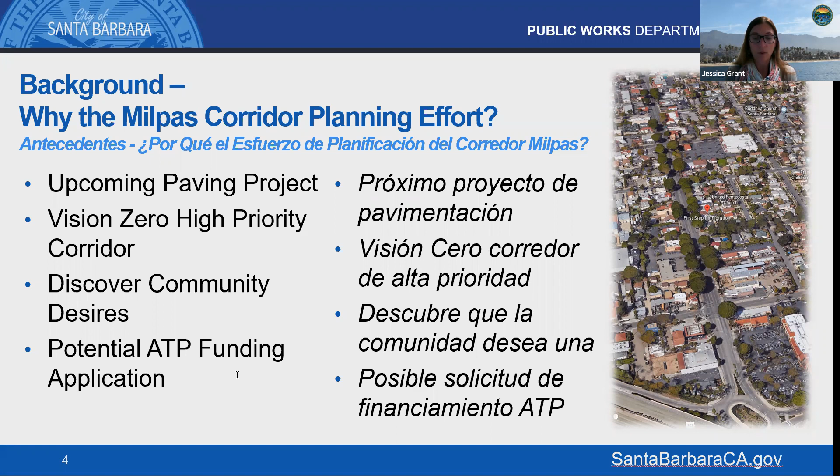So in October, we had the first workshop. It was a listening workshop to discover community desires and needs for the future of Milpas Street. We also had a supplemental survey as well.

Then in January of 2020, we returned to the community with proposed approaches to address community concerns. The proposed approaches that received community support at the approach workshop focused on pedestrian safety enhancements such as safer crossings, enhanced street lighting at intersections, tree management, and sidewalk widening.

In April 2020, we presented what we heard from the community and the suggested approaches, and City Council did agree with those, directing staff to apply for an active transportation program grant, which we did back in 2020.

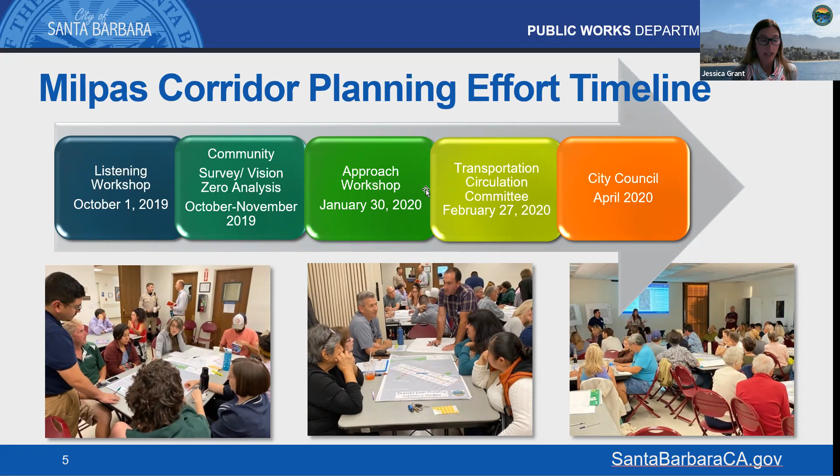So the next few slides will cover the approach from 2020 that was community supported. It basically involved improving the pedestrian environment and space by reconfiguring the sidewalks and the tree wells, and also improving pedestrian safety at intersections, all in synergy with the upcoming maintenance project.

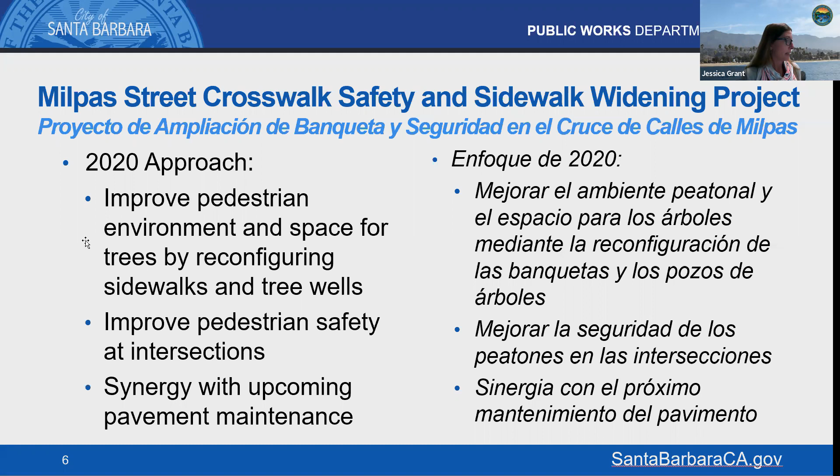As a specific example, we don't have the entire corridor, but just a snapshot of a block along Milpas between Mason and Yanonali Street. Shown in red is the realigned curb, again to make more space for the existing mature trees. Behind that, the sidewalks would be widened, and these are the parking pocket concepts.

Each intersection would also have improvements for lighting. In orange are the existing lights, but we also proposed additional street lighting at the other corners of the intersection, so that all legs of the intersection would be well lit.

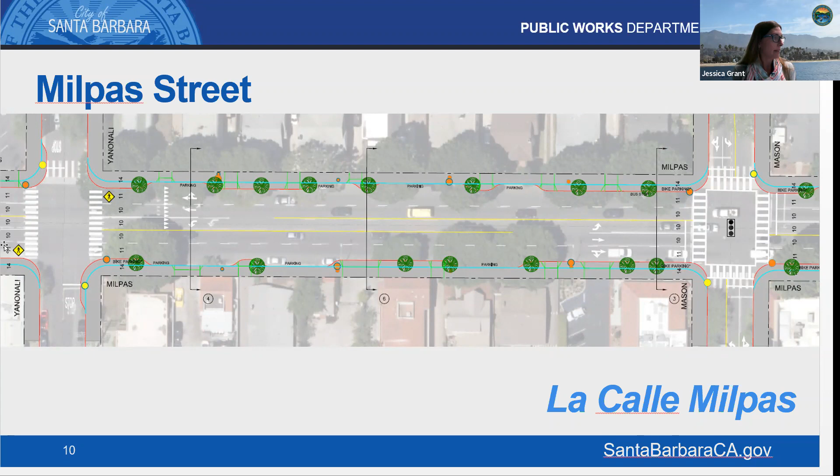For a project of this size and scope, we had to seek grant funding from the Active Transportation Program, which can help fund higher dollar projects. It's an extremely competitive program. The state releases approximately 450 million statewide every couple of years, and since the cycles started in 2014, each cycle has become more and more competitive.

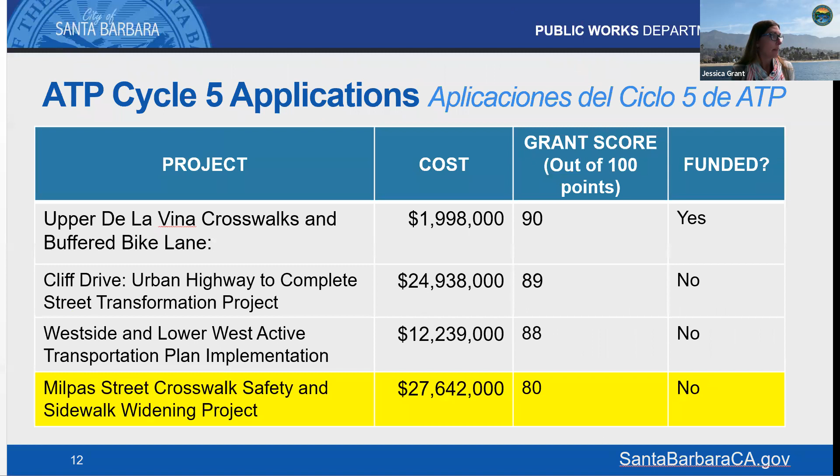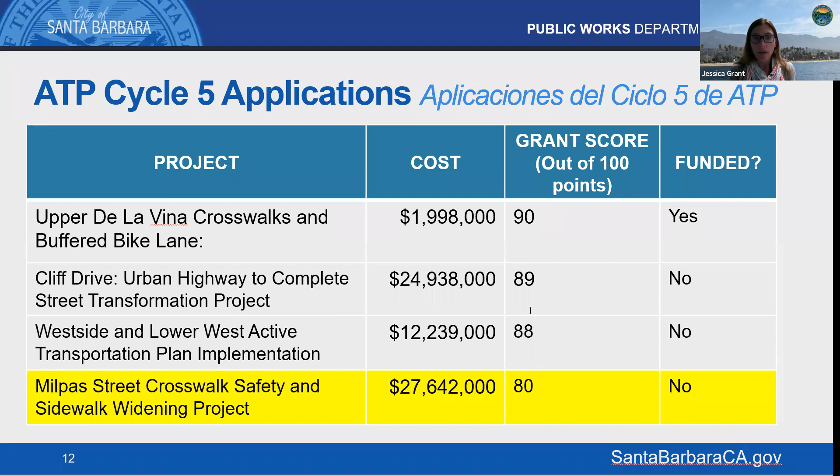In 2020, we submitted 4 grant applications and received funding for only 1. Unfortunately, we did not score well on the Milpas application. The cutoff was 90 points, and we received 80 points for the Milpas application.

When we met with the state a couple of times to review the scoring for this application—it takes a couple of meetings with them—the grant rubrics for this application are very detailed and specific. What we heard from the state is that the project was not transformative enough based upon the project costs. The cost for these improvements along the Milpas corridor was approximately $27 million.

So the state's advice for us as a city was to look at rescoping the project so it would not be judged on the transformative rubric. It would go from a larger project to a medium-sized project, and in funding terms for that program, it would need to be reduced to approximately $10 million.

Nothing about the project was necessarily bad—it was all good—but the state said to really focus on intersection safety and comfort, and on the bus stops, to improve the transit comfort along this very busy corridor.

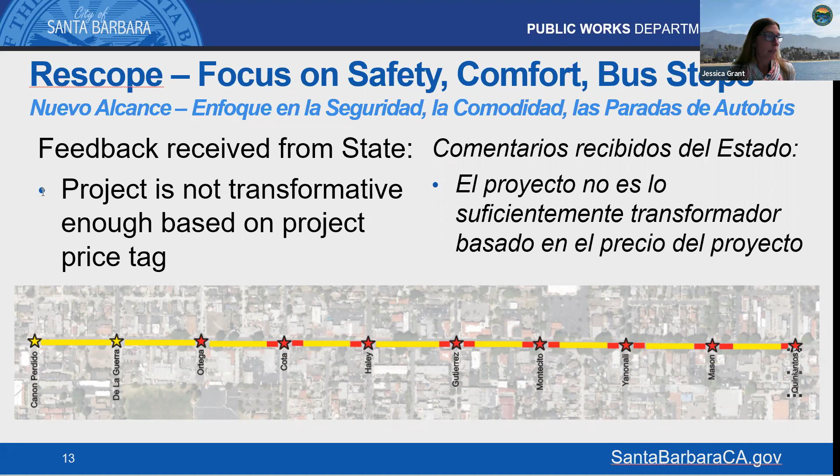So your feedback for tonight—we really want to hear from you about this rescope. For the upcoming maintenance project, what we could do within our normal pavement maintenance budget would be to focus on high visibility crosswalks, better quality pavement markings, sidewalk repairs, and ADA improvements as well.

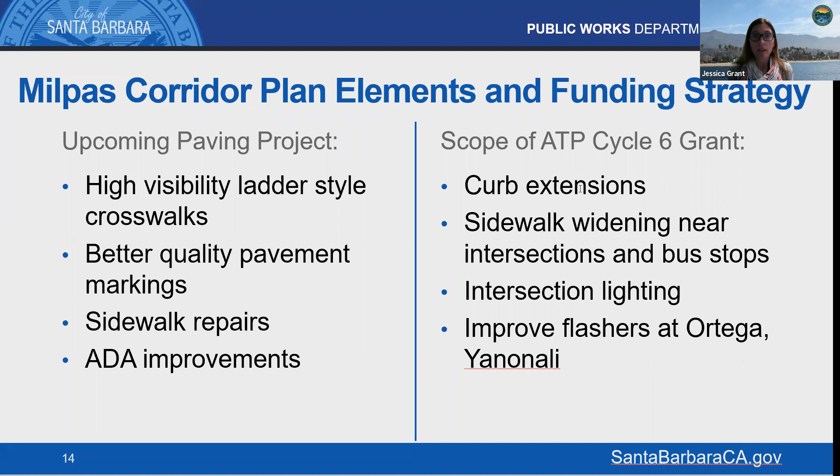What we think would be a good scope for this upcoming grant cycle, due in June of this year, is to add curb extensions at the intersections, sidewalk widening near the intersections and bus stop areas, enhanced intersection lighting, and improved flashers at the Ortega and Yanonali intersections.

So to repeat, these are the items we are proposing to apply for, shown in red. The areas in yellow will be maintained, but the major work will happen near the intersections. At this time, we do not know when funding will be available to widen the sidewalks in the middle of the blocks.

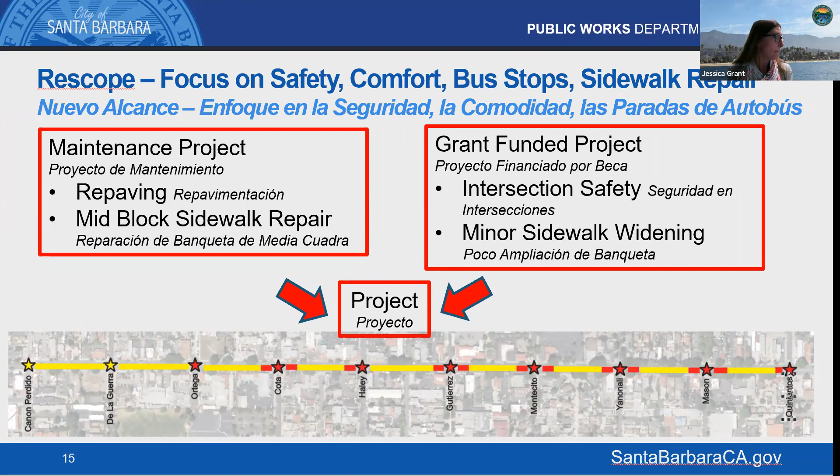This is an example as far as when we look for safer crossings, to include high visibility markings, as you see in this photo on the left. And then at the Ortega and Yanonali intersections, we'd also introduce an overhead flasher.

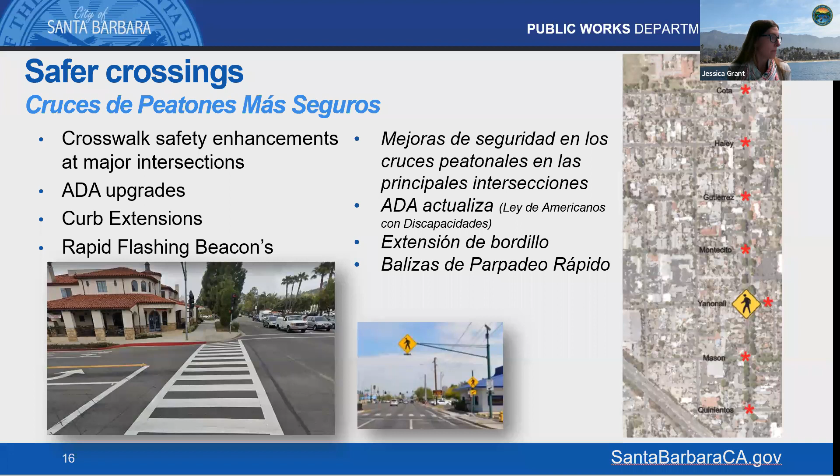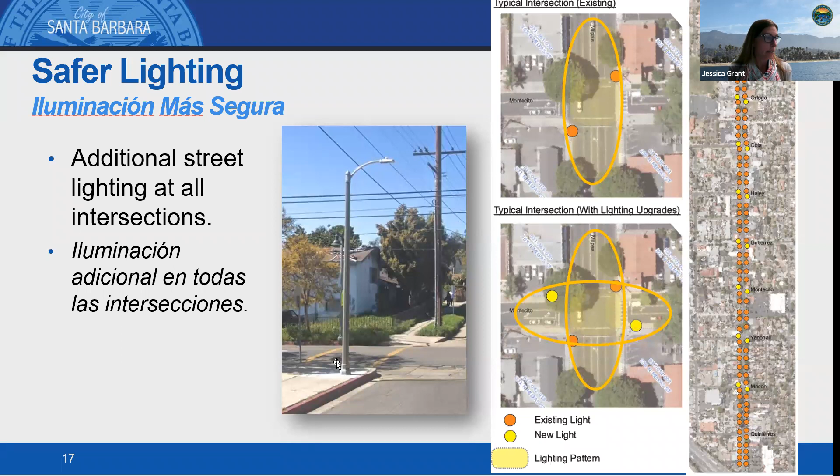We'd also add lighting at all the intersections between Quinientos and Canon Perdido streets. This aerial image shows the existing lighting and the area it covers. We're proposing to have lighting at all legs of the intersection.

We would also have some curb realignments at the intersections, which would help with sight and visibility, and allow more room for the existing bus stop locations. As you can see, this is one of the existing bus stops, but there's not a lot of room in this area. A lot of the bus stops feel pretty cramped and narrow.

So widening out the curb will allow for more room at those locations. With that, I would like to pass it off to Derrick Bailey, our city traffic engineer, to go over each of the proposed intersection improvements in a little bit more detail.

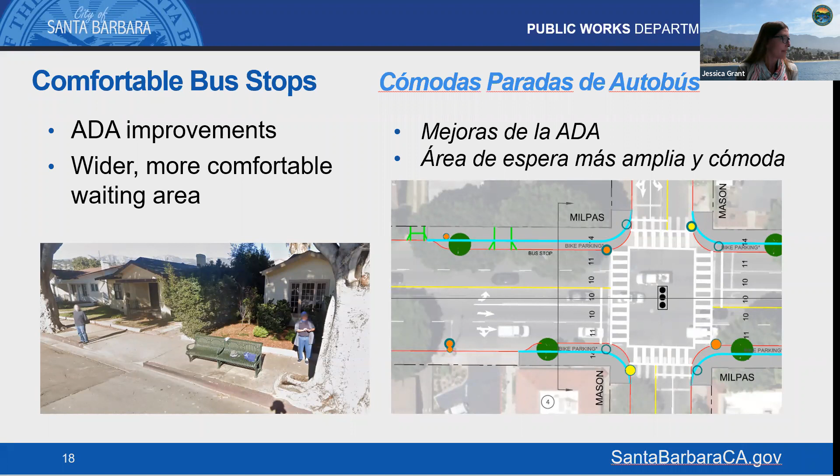Thanks, Jessica. I'm going to go fairly quickly through these layouts. It's a lot to digest, and it can be difficult to fully understand just based on what's on the computer screen. So I'd encourage you, if you have time, to join us on Saturday. We'll have full printouts of the entire corridor so you can take a better look in more detail, or go to our website. Those same printouts will be available there too.

At a high level, at Canon Perdido Street there are no changes other than new lighting. The way the lighting exists right now, the lights hang over Milpas Street, so the Milpas approaches are well lit, but the side streets are not. Those yellow dots on the screen are new lights, and the orange ones that hang over Milpas are existing lights that won't change. So that'll be new, safe lighting for the intersection.

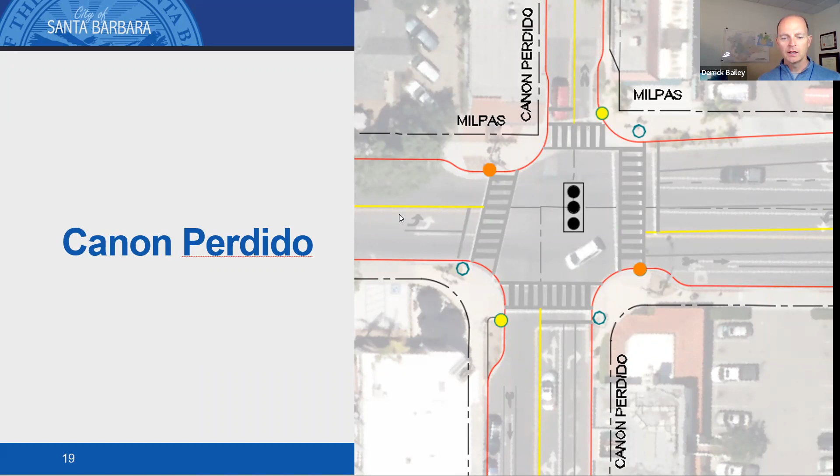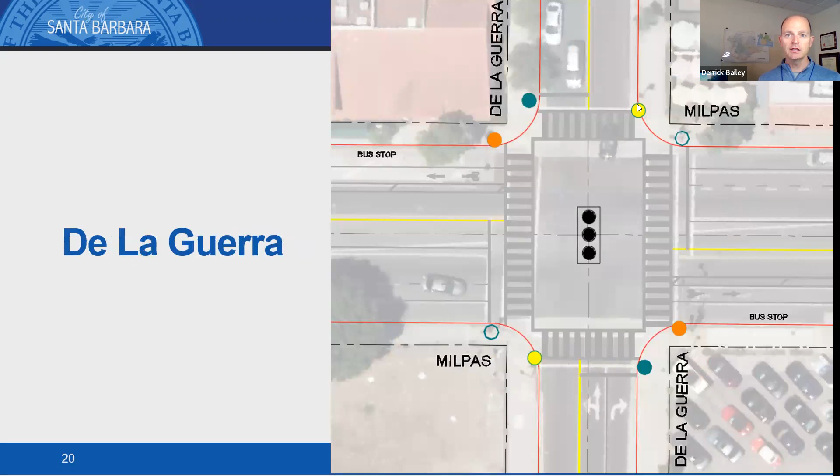De La Guerra Street, similar to Canon Perdido, just new lighting, and we would replace the ADA access ramps with the paving project, as well as any sidewalk repair needed in the area.

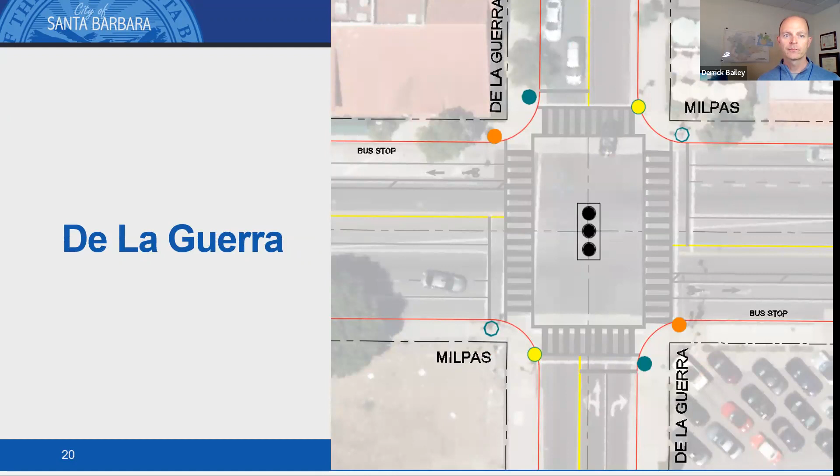There's also new lighting planned on the side streets. There is a development proposed on the northwest corner, and depending on how that moves forward, we'll have to coordinate with them as well.

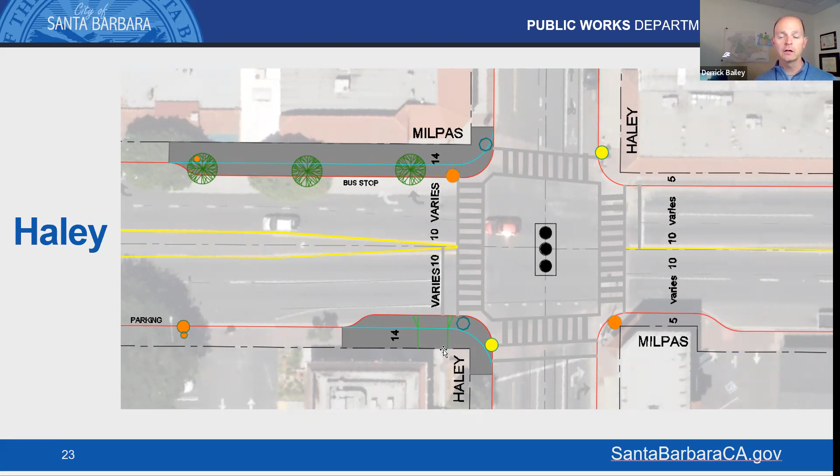Moving to Haley Street, on the north side, the northeast and northwest corners, in front of the Jack in the Box and across the street, that's where the sidewalk widening will be shown in dark gray. The south side of the intersection will just be sidewalk repair, since that's already a narrowed part of the street, plus new lighting on the side street approaches.

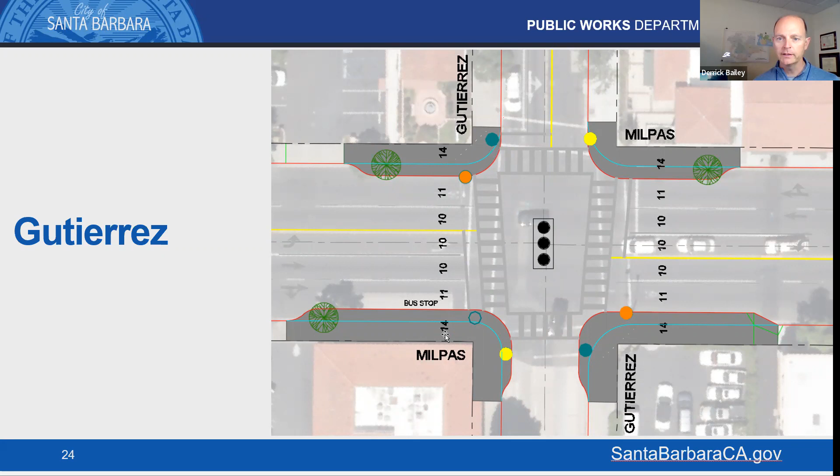At Gutierrez Street, all 4 corners would be widened, including the bus stop on the northwest corner across from the 7-Eleven, and new lighting.

Montecito Street: all 4 corners would be widened and new lighting added.

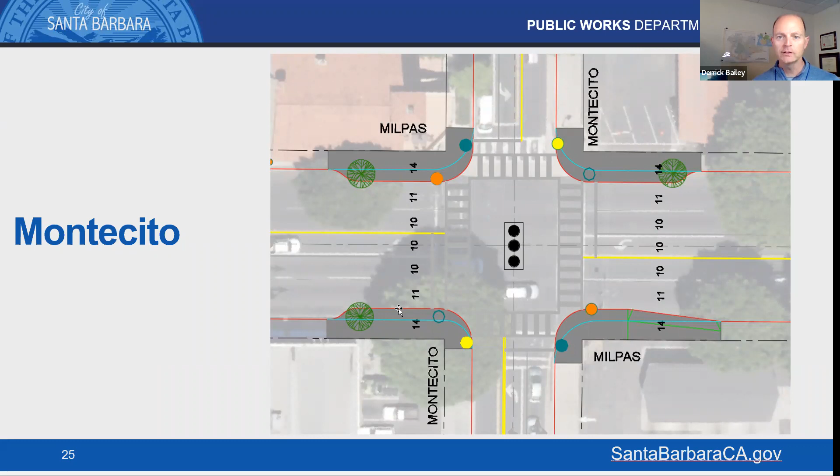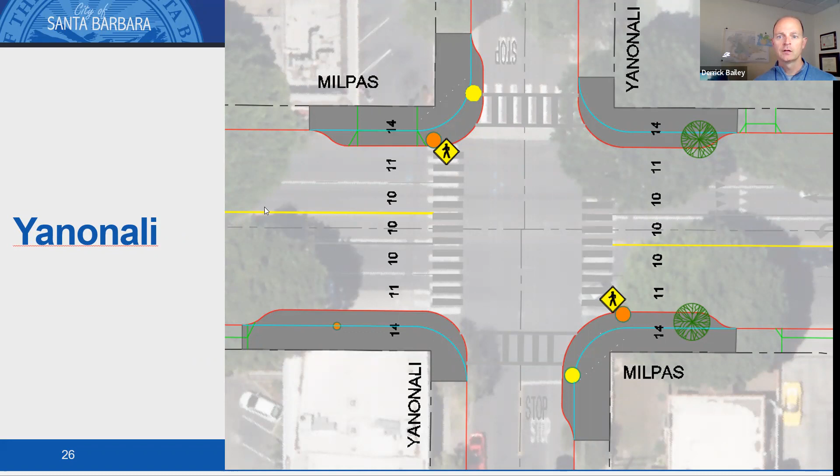Yanonali Street would be next. Again, all 4 corners would be widened, and this is where the mast arm mounted overhead flashers will be installed, along with new lighting on the side street approaches.

Mason Street would have the most sidewalk widening, since that's where there are 2 very busy bus stops. So all 4 corners will get widened, especially those 2 corners with the bus stops, plus additional lighting in the area.

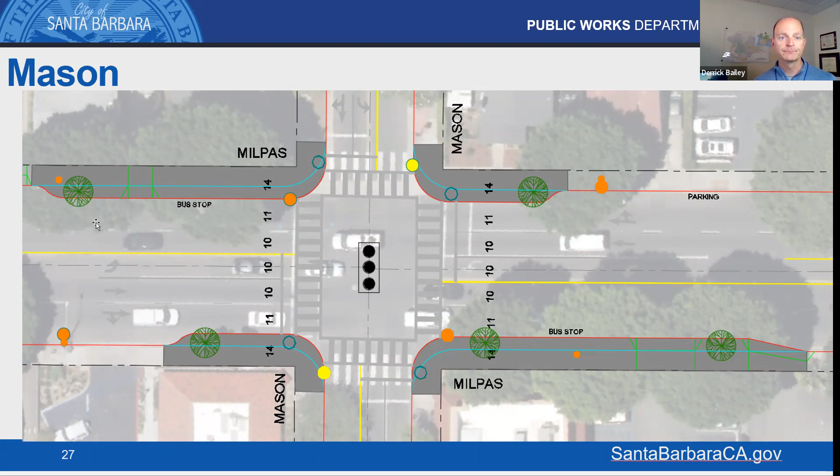Lastly, at Quinientos Street, just on the north side of the street, that's the only place we have room. So the northeast and northwest corners will get wider sidewalks. There is lighting on all 4 corners out there, but we would retrofit them with LED lights that provide better crosswalk lighting, which will be a safety improvement as well.

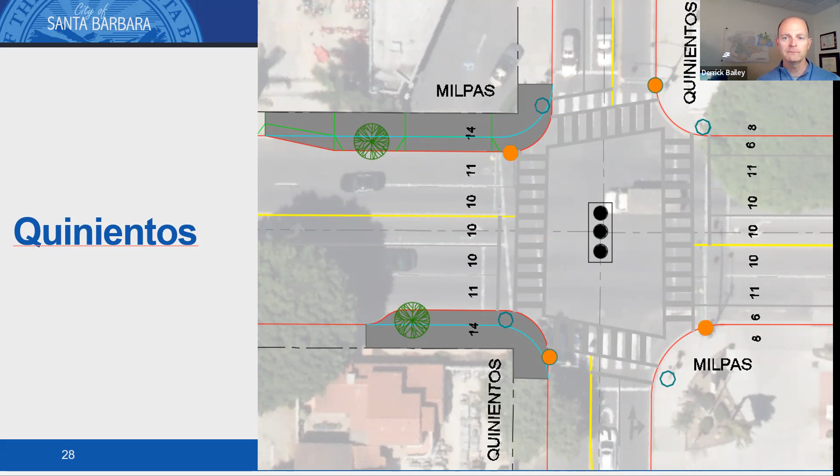I know that's a lot to digest, but it'd be great to see as many people as we can on Saturday at the Franklin Center, or go to our website. If you have any questions, feel free to email anyone on the team and we'll get back to you.

Thank you, Derrick. So as discussed, what was shown tonight, a ballpark for the improvements would cost about $10 million.

Another way to increase chances of project funding is for city contributions or matching funding. When council starts to discuss the budget in early spring, we plan on requesting additional matching funds towards this grant application. In the past, the city has contributed a 1% match for the various applications we've applied for, and that would give us 1 point on the scoring rubric for the grant.

What we saw at the last cycle, as I've mentioned, every cycle gets more competitive, and that was sort of the breaking point of which projects got funded and which did not. So matching funding becomes very important to ensure receiving grant funds.

So that will be a conversation we'll need to have with council. Of course, council before them in their budgeting has to look at all city and infrastructure projects, so it's not an easy decision for them given the limited funds we have at the city.

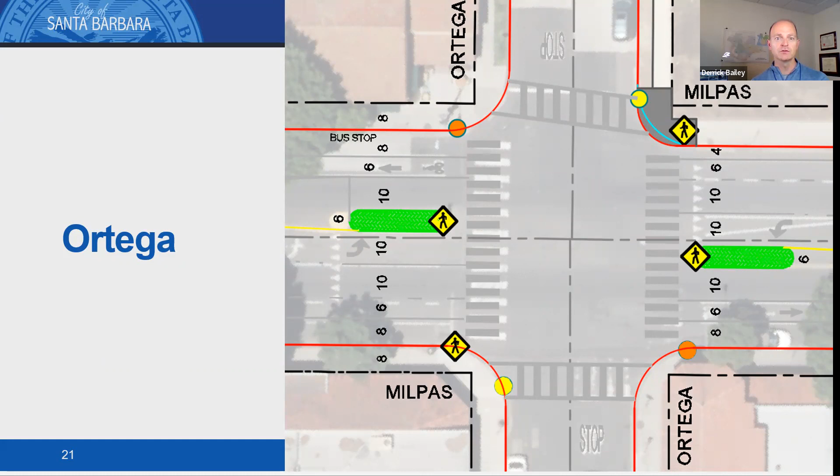That is very insightful and gets to the crux of our challenge here. For those who attended our workshops back in 2019 and 2020, there was a pretty thorough community discussion over those trees. It's kind of a love-hate relationship—the canopy is beautiful, but the trees take up a lot of room. You're right that the trees were never intended to grow that large. Really aggressive pruning when the trees were young, half a century ago, would have created more of a lollipop shape. But unfortunately, we have trees that are too large now.

When it comes time to do the paving project, and hopefully we get funding for the intersections and sidewalk repair, we'll have to go out with the city arborist tree by tree, inspecting these. Some trees along the corridor are declining in health, and some are unlikely to survive aggressive sidewalk repair, so those will likely be candidates for removal. As far as full-scale removal, one thing we heard from everybody last time is that getting rid of the canopy all at once is not desirable either. But if we can start introducing new trees that fit within these tree wells, we can gradually bring up a new canopy as the ficus trees are replaced.

Can you repeat, please, what time you people are going to be at the Franklin Center? We'll be there from 10 a.m. till noon on Saturday. I will be there. Excellent.

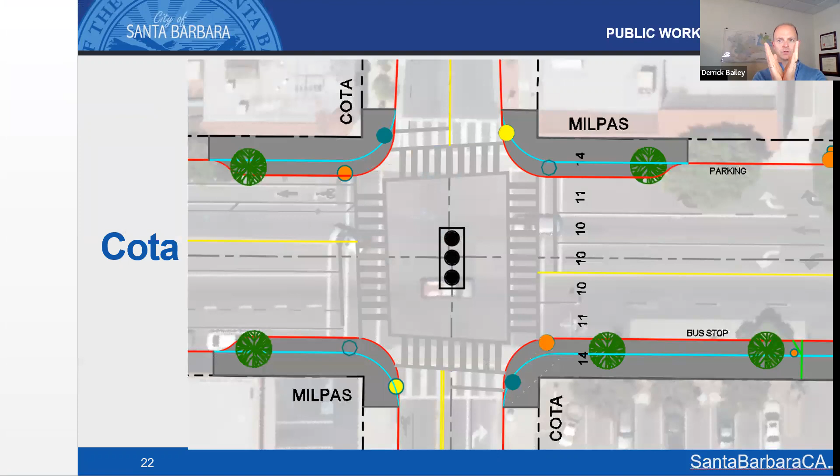I'll take that one. Yes, and the nice thing about widening sidewalks is it gives you more space. What the person is asking is, can you split the ramps up so that it's two ramps effectively that point into each of the crosswalks. A lot of our downtown corner ramps don't have a lot of width, and we can't squeeze those ramps in between the existing traffic signal poles. But out here, we would definitely have an opportunity to do something like that, and yes, that would make pedestrians feel that much more comfortable on Milpas Street. I don't think it's going to necessarily make us more competitive in the grant applications, but it's definitely something we would want to incorporate into the project.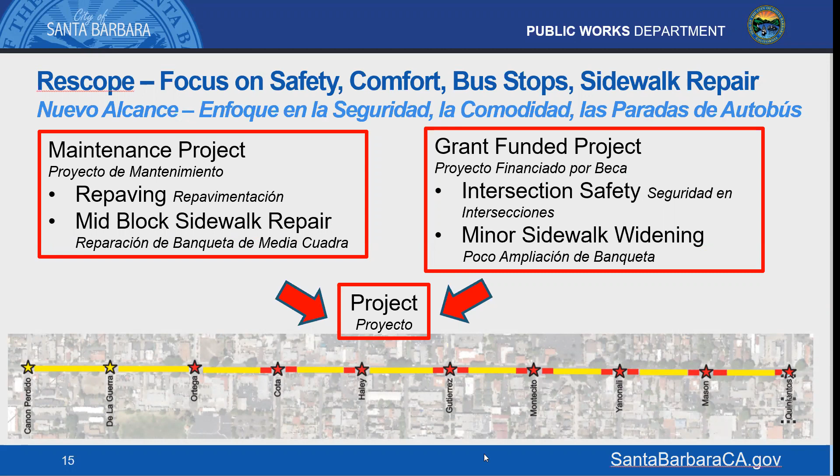Hi, well a lot of this looks very good. I live on Aliso Street, so I'm always walking on Milpas. But there's one safety issue that hasn't really been addressed. I often take the bus and get off at the stop you talked about, at Cota and Milpas. Then I have to cross Milpas, and that's still a dangerous crossing because cars making right turns aren't looking for pedestrians. I get nervous, and sometimes I wait until I catch the driver's eye. You mentioned enhanced crosswalks might help, but I don't think that's enough.

I have a similar concern for the bus stop on Haley, almost at Milpas—same problem, cars are looking for other cars, not for pedestrians. Maybe there should be some signage or something to make them aware that pedestrians are crossing. So that's my concern.

Thanks, those are really good comments. A couple of things that will be better with this plan: the high visibility crosswalks Jessica mentioned, the ladder style crosswalks. When we repave roads now, we use a much more durable material so it doesn't wear away like paint does—everything on Milpas is currently paint, so after repaving those markings will be higher quality and won't wear away as quickly. With the sidewalk widening, it will narrow the crossing, which right now is about 64 feet across Milpas Street, down to about 56 feet. It's still a wide crossing, but you won't be out in the street as long.

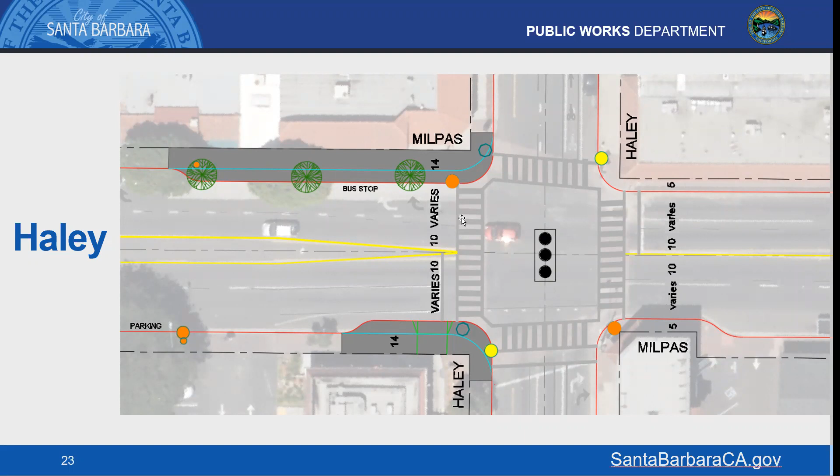Thanks, Barry. At this point, I think we're open to exploring all avenues. The leading pedestrian interval has worked well at a few other intersections in the city, and I think we're open to studying it for Milpas as well.

Thanks, Derek. There is a comment in the Q&A in agreement with the previous suggestion for not having diagonal ramps. The comment is: I recently suffered a bad fall tripping over the edge of a diagonal ramp while walking in low light conditions. I had not expected that ledge at the edge of the ramp. I would expect a cleaner approach while crossing the street.

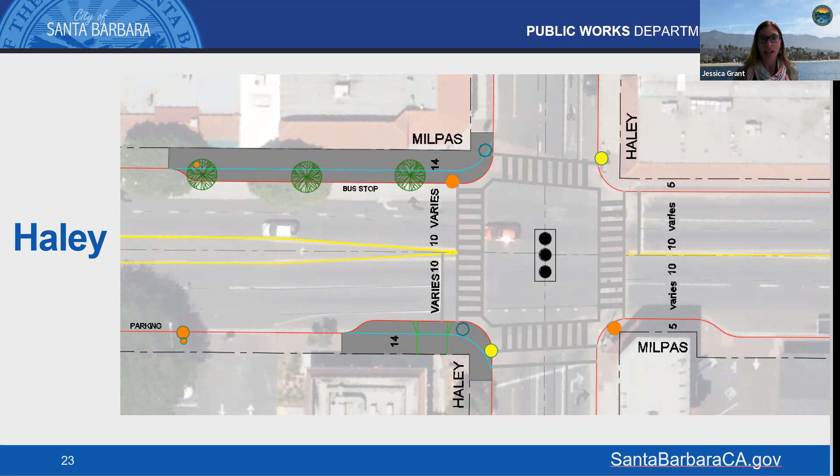Like I said, it's worked really well at a couple other intersections in the city, like Micheltorena and San Andres. So if you haven't tried them, we'd encourage you to go out and experience those. State and Gutierrez would be a good one too, because there's a lot of movements at that traffic signal going on. That would be fairly similar conditions to Milpas Street.

I do see one comment in response to your question, Derek. The comment is: the green light is too short, especially at Santa Barbara Junior High start time and dismissal time. We need to remedy left turning cars impeding the flow of straight flowing traffic. Could a left turn lane be created heading east or west?

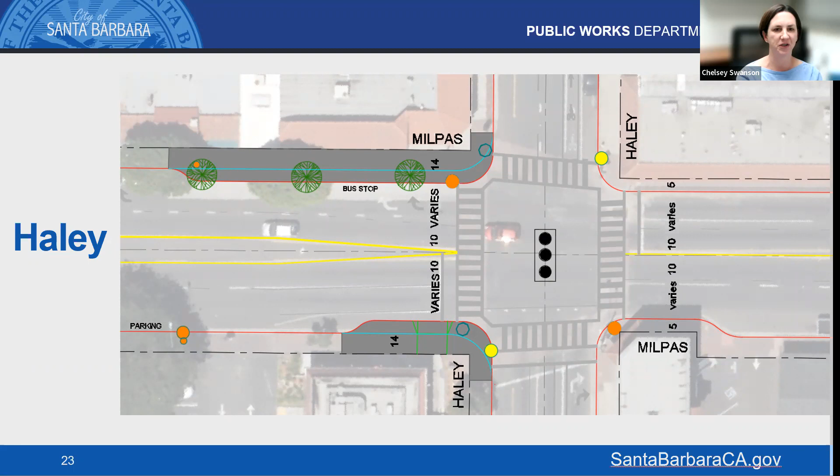Yep, so that's getting right to the point of the trade-off I was talking about. I'm assuming they're asking about Cota Street. Cota Street coming out of the east side, going westbound towards the junior high — that approach is not wide enough to squeeze in a left turn lane. So the green time we give to Cota Street comes at the expense of Milpas Street.

And right at the beginning of school for the junior high or high school, it's busy on both approaches. There are literally thousands of people trying to get to the same place at the same time. So to make the light longer on Cota means making it shorter for Milpas, and Milpas is quite congested as well. So the trade-off with that leading pedestrian interval is it would make the Cota green light a few seconds shorter. That's the trade-off I was talking about. It adds that extra element of comfort and safety for pedestrians, but it does have that trade-off of less green time for vehicles.

Thanks, Derek. I do see a hand raised again. Barry, go ahead. I just wanted to share that this is a great conversation about the leading pedestrian interval, and another example of where that happens is at De La Guerra and Santa Barbara Street, also where new developments have been placed. One thing that's interesting is that, for example, the Yanonali, Gutierrez, State Street intersection really works well because cars that want to turn left have to wait for that green light before they can make that maneuver.

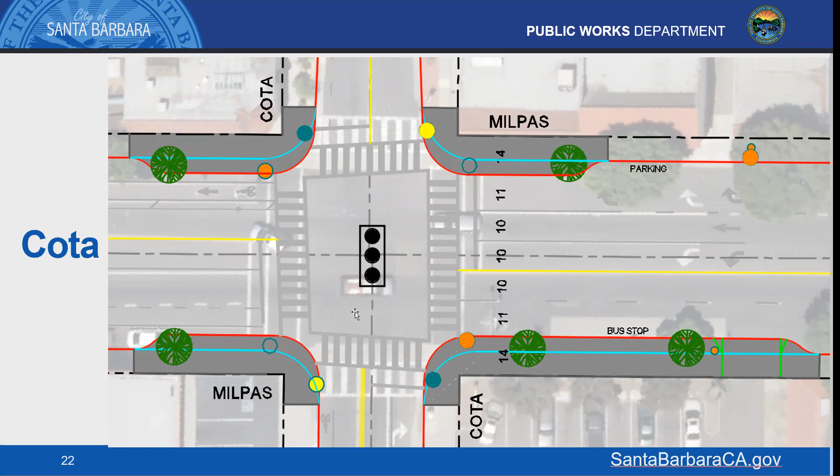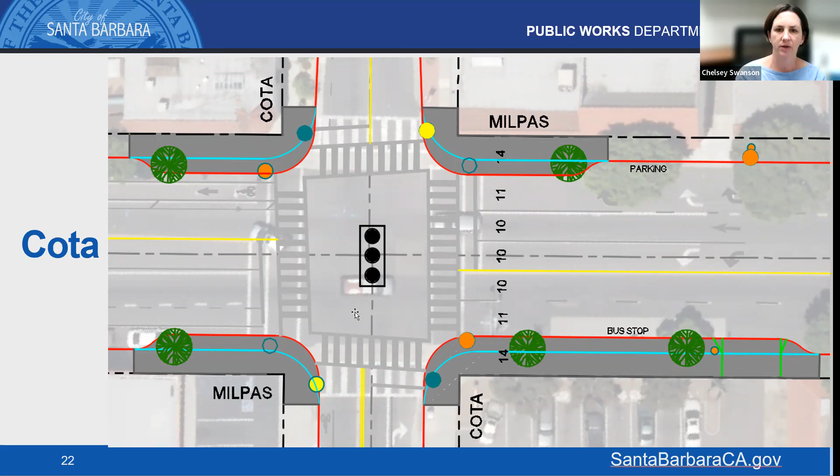Thank you, Barry. There's also a comment in the Q&A saying the leading pedestrian interval sounds good, but people on Gutierrez can't proceed without the light turning green. At Cota Street, they can turn right at Milpas after stopping at a red light. This is the danger — perhaps it should be no right turn on red.

I don't know if you have any comments about that, Derek. Yeah, it's something we can consider as well. Again, it's a trade-off between traffic capacity and safety. We should always favor safety, but the reality is the more restrictions we place at an intersection, it can add to congestion, and that can increase people's frustration and further some of the bad behaviors going on out there. So it's not that it's not a good idea, it's just a consideration and one of the things we have to balance.